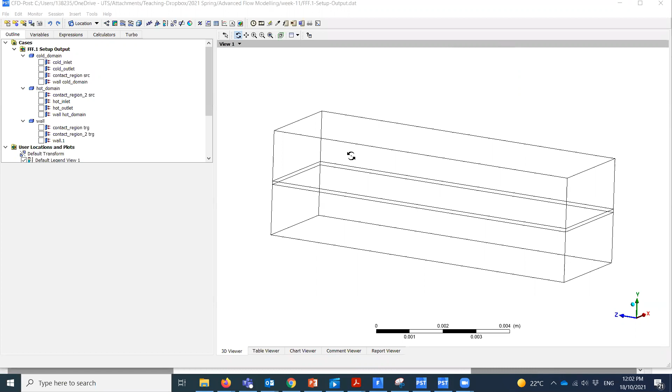Okay, so in this video, we will try to understand how to do all the post-processing for heat exchangers. So here, this is the model. You already know we use this simple model for heat transfer modeling. We have all the domains: the cold, the hot, and walls. So if I click on the wall, we have the tiny wall in between the hot and the

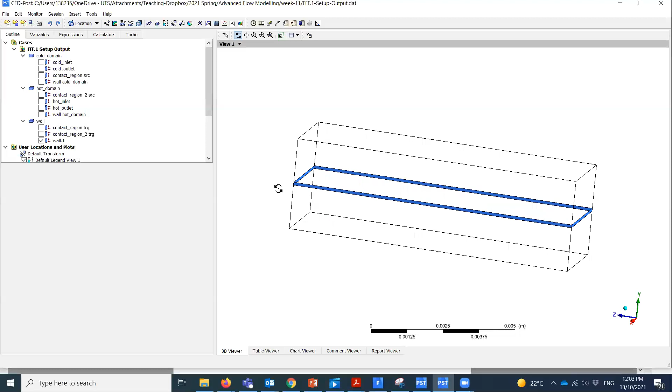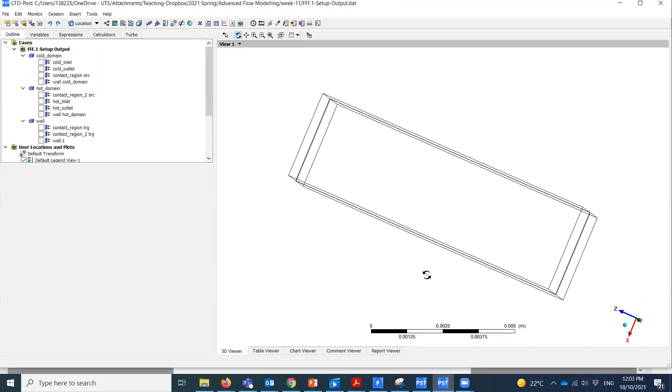cold domain. So initially, we all know how to do all the post-processing basically for the velocity, temperature, or pressure. So now I'll quickly show you how you can do the post-processing for this case. So let's say I'll just use the model like this. I will only check this wireframe. If you want, you can actually click it here and then you'll see nothing.

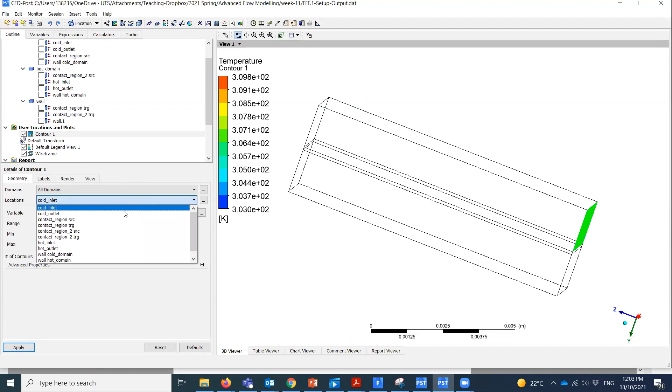Anyways, so let's click on the contours. Then you can select the variable temperature, and definitely we'll select the local temperature, not the global one. And if you click on apply, you see I selected only the cold inlet. So what you can do, you can click here, you can see these three dots, and select all the domains. So click on OK and then click on apply.

So previously it was a little different. We created a plane for velocity or pressure for the previous two projects. And now when we're talking about heat transfer, we need to think about the whole domain, like how it is happening in between the cold and the hot domain. Now, if you want to remove the wireframe, you can do it. So now you'll see how it looks. You see, it's clearly showing the contours.

If you want to include more contours, you just increase the number of contours. Then it will show all the transitions, like how the hot and the cold fluid is going. And definitely you should think about the quality of the figure. Anyways, so this is how you can show the temperature contour, okay? So you can do that.

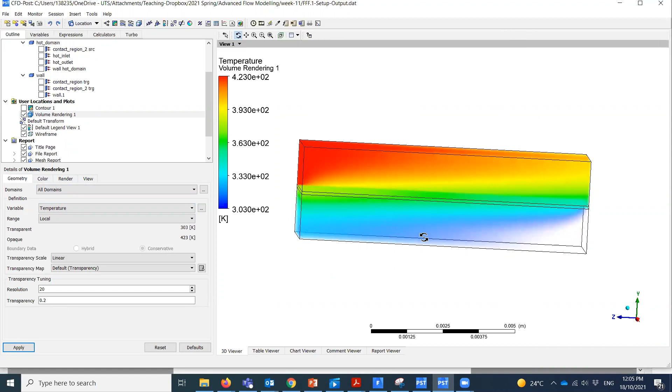If you want to show some volume rendering contours, you can just uncheck this. For the volume rendering, select the variable temperature and then the local temperature and see how it looks. You see, it looks nice, but in this case, I would suggest you select the wireframe for a better view. So look here at how it looks if you use the volume rendering.

Anyways, we will use this contour for now. We need to answer the question of how the temperature is changing from one end to another end, I mean the temperature profile. So what I can do, I can create a line from here to here, or I can use a line along the diagonal of the system.

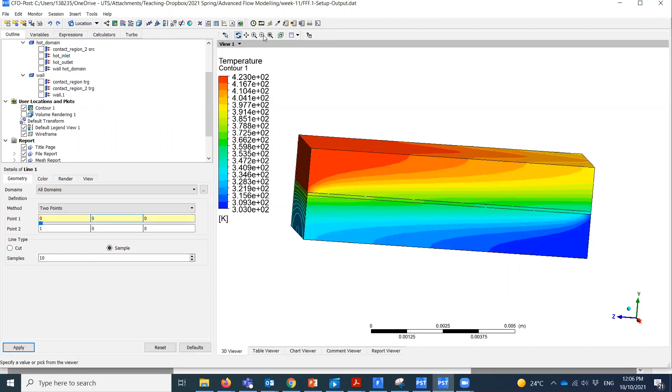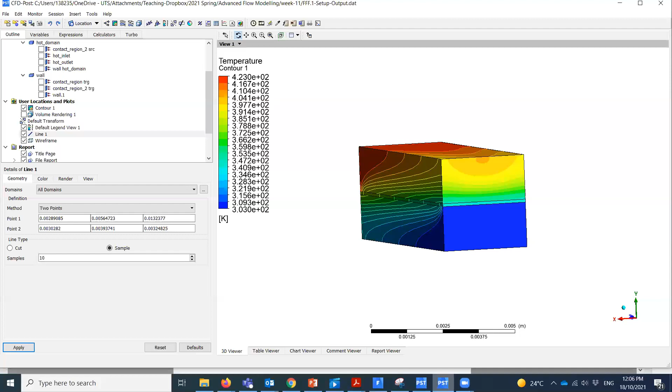So let's go to the location, click on line, and then I'll just put my mouse cursor over here. I'll rotate it a little bit. So let's say I'll select this point, the middle point. It will automatically extract those points. Now I'm using the hot inlet and the cold inlet. So put your mouse cursor here again and click there. If you click on apply, you see this is the line we created, from the hot inlet to the cold inlet.

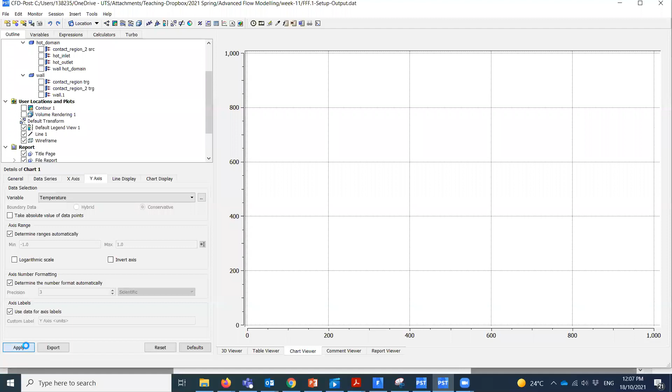And now if you go to the charts, you can select the location here, line 1, for the x-axis. You select what you want to show. So let's take position, y-axis the temperature, and click on apply. So now you see how the temperature profile looks.

And it makes sense because, you see, we found in this line it is the hot inlet, the temperature is 420, the cold inlet you see 300. So we can validate this. If you go to 3D view and look at this, you see the temperature is higher at this position and the low temperature here. So it's kind of 423 and this is 303, something like this. So look here. Yeah, this is 300, so it should be kind of 303, and this is 423. So it makes sense.

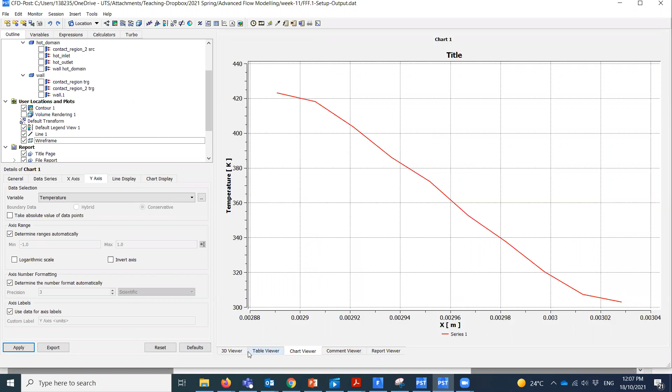So if you have multiple cases, I would suggest you put all plots in the same frame and do some comparisons. So this is how you will show the temperature profile. But for the temperature contours, I would suggest you present it like this. Don't create the planes, because I really want to see how the heat transfer is happening between the hot domain and the cold domain.

So if you make a plane and draw the temperature contour on that plane, it's not correct. Anyways, I'll just create a plane now, and I'll show you what it could be. So I'll use the XY plane like this. So let's say some random values. If we move this one, I'll just move this line.

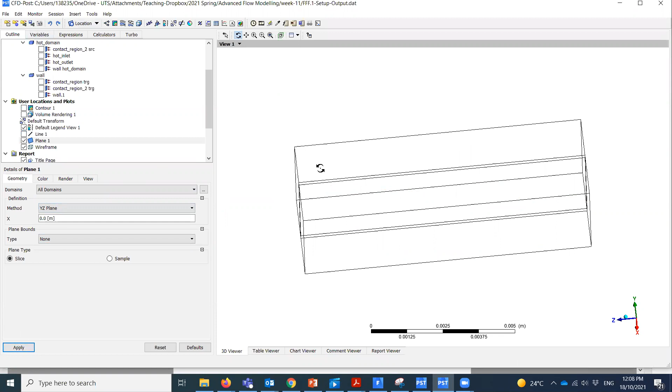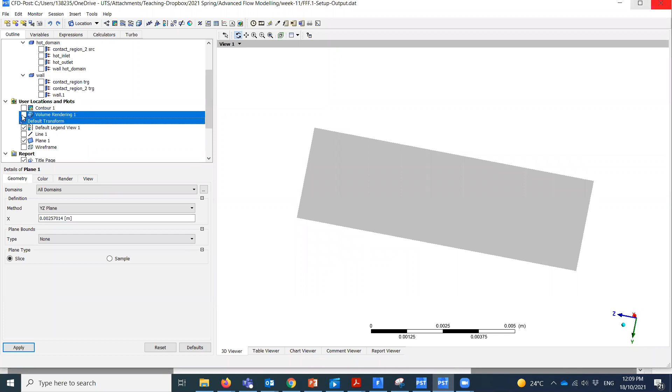Okay, instead of XY, let's say the YZ plane. So we should change this value. Yeah, so I will create a line like this. So move this wireframe. So this is our plane. Now, what you can do, you can go to the contours. Click on the contours. Instead of this, just select the plane and see the temperature.

Look how it looks when we created the plane and then plotted the temperature contour. It's clearly showing. The way I created the plane, it was in the YZ axis. So this is the hot and this is the cold plate. The hot plate is going this way, cold plate is going this way. And it's clearly showing the heat transfer. But I really want to see it for the whole domain.

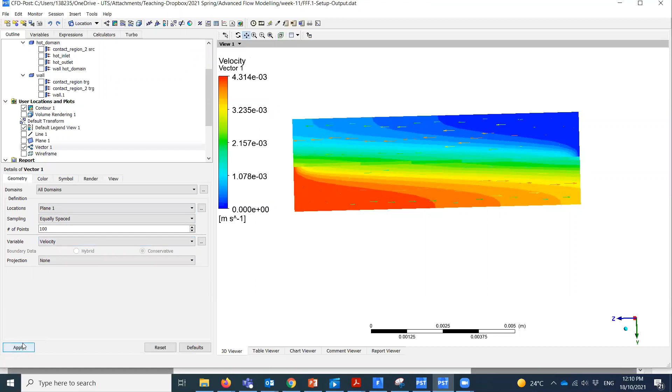So now we need to answer another question: how to plot the vectors. We can plot the vectors in the direction of the flow and the heat transfer. So click on the vectors, select the location plane and the sampling. I will suggest you use the equally spaced, and for the variable, you just use the velocity for now. Move that, put this vector like this, it just creates a number of points, and just click on apply.

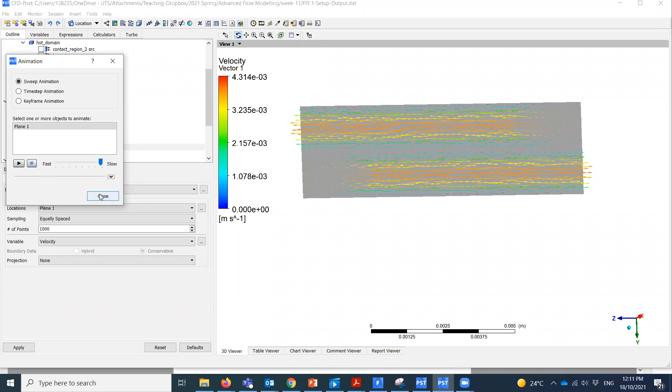So this is how you can see how the contours look. So it is actually our contour, and if you want to see how it is actually moving, you can make some animations. You can see this is so fast, but we can see the other contours over there. We need to use more time steps. Anyway, that's not our target. So you can make it much better.

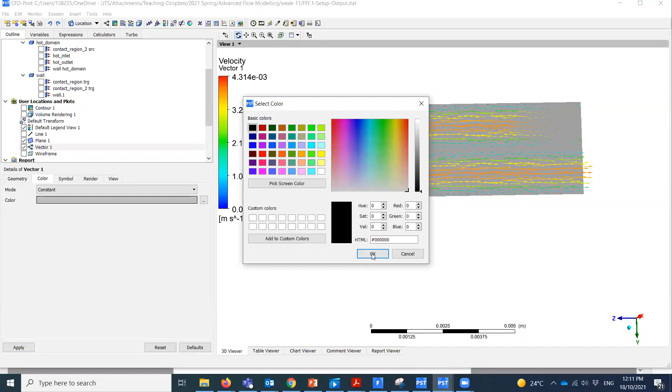This is actually showing the colors. So you can change the colors from here, and you can use the constant. Let's say if you use the black color, then it will be more visible like this. You can change the symbol and the symbol size as well. So let's say if you put it 0.7, we have some errors just outside. So if you want, you can fix it. If it is 0.4, then it looks like this.

You can make more zoom. So you can do a lot of things. You can change the arrows. Yeah, so you can play with it later on. So this is how you can generate the vector plots for this case.

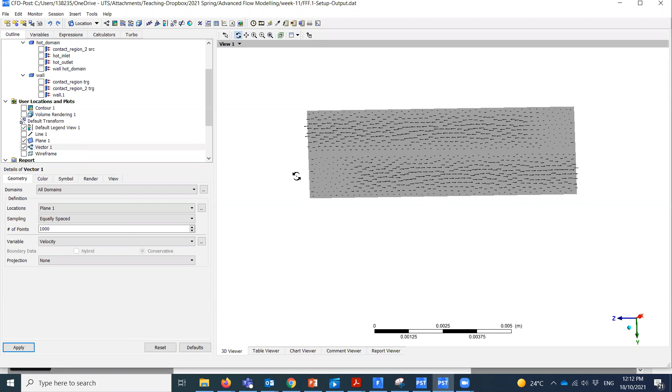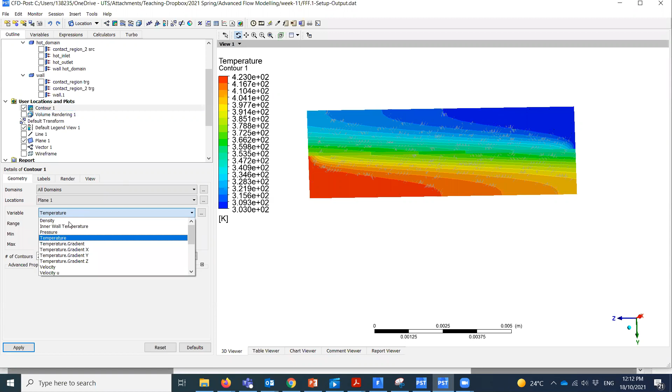So for pressure contour, I would suggest you can create different planes along different axes, and that will give you a much better figure for the pressure contour. Okay, so you can also calculate the pressure drop for better post-processing. This is better post-processing and better presentation. You can calculate the pressure variation, the pressure drop between the inlets and the outlets of the hot and cold domain, and that will be really fantastic.

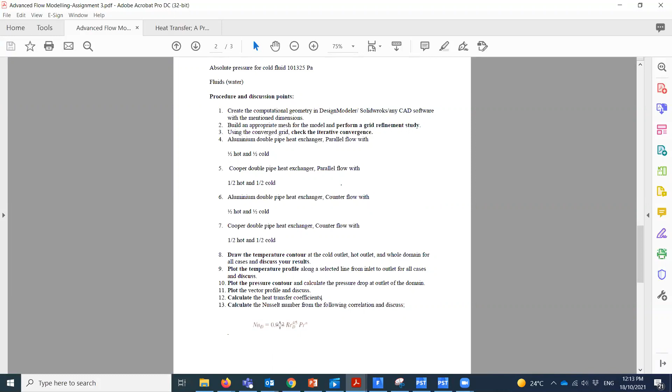So now the remaining question, let me check what sort of other question you need to answer. So we know temperature contour, temperature profile, pressure contour, vector profile. The heat transfer coefficient. Heat transfer coefficient, you need to use the formula. Okay, so at first you need to calculate this Nusselt number here. You look here, this is the Nusselt number correlation that you need to use. This is called the Dittus-Boelter correlation.

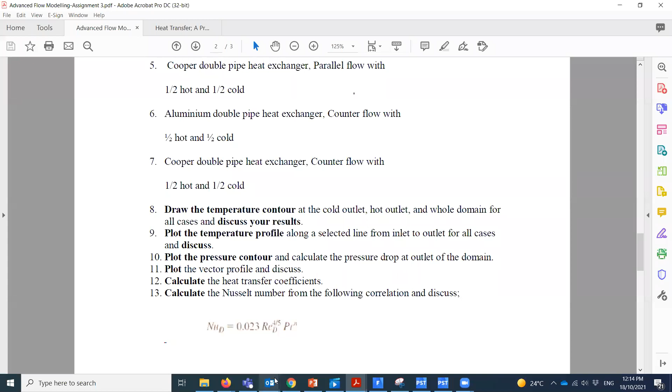This Reynolds number you'll definitely calculate by using your inlet velocity, your pipe diameter, okay, and the water viscosity that you need to use. You know, the Reynolds number is equal to rho VD over mu, viscosity. The Prandtl number, you know, for water, this is a constant value, and this is n. If it is a heating problem, it is 0.4. If it is a cooling problem, it is 0.3. So you need to use actually this formula, and then you can calculate the Nusselt number. Although I believe all of you know how to use this correlation.

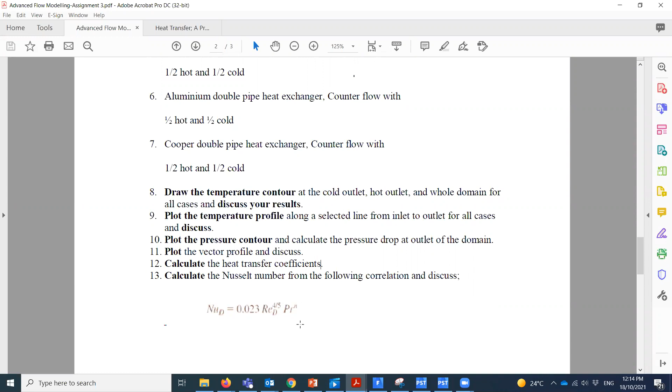So once you have these correlations, then you can actually use some formula from the heat transfer book. Like we know the formula to calculate the heat transfer coefficient. So I'll quickly show you one here. So yeah, so this is the formula, how you can calculate the heat transfer coefficient. This is a function of the Nusselt number. So you need the thermal conductivity, you need the hydraulic diameter, and you need the Nusselt number.

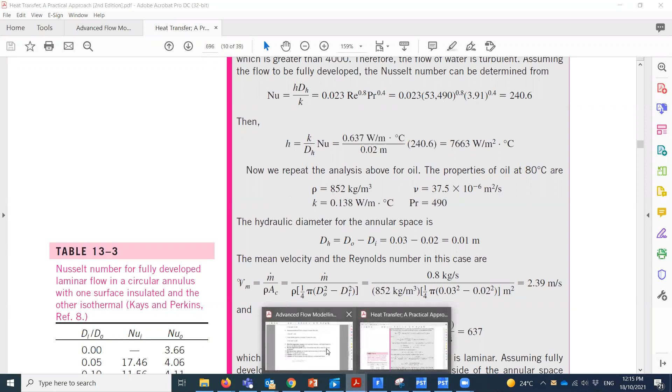So we already have the Nusselt number from that correlation. The thermal conductivity, you can get it from the tables, and hydraulic diameter, you can calculate it easily. So then you will be able to get the heat transfer coefficient. So this is the formula that you need to use for heat transfer coefficient. And finally, you need to answer the question. You need to connect your results with the existing literature.

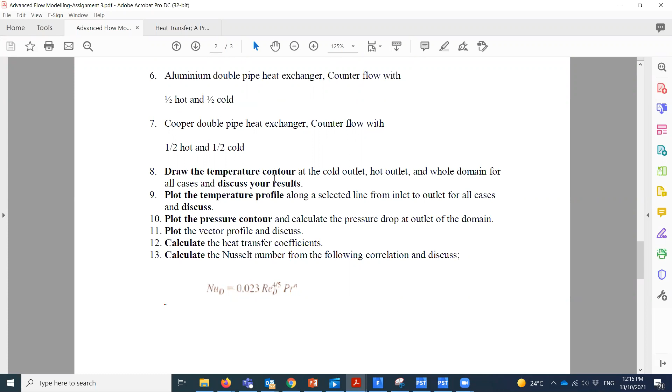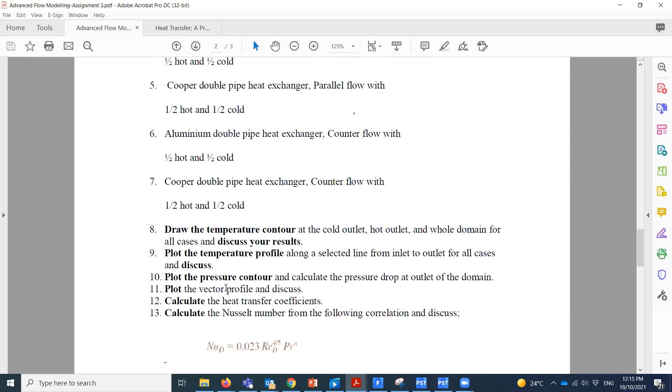So you just search. You can use some double pipe heat exchanger results, and there are a lot of options. You can select the counter flow, you can select the parallel flow, whatever you want. You have two cases. In fact, you need to run 4 different simulations. So total 4 different simulations for 2 different flows, counter and parallel flow. So this is the whole question you need to answer for this report.

So I believe you understand, and I will discuss more advanced and innovative techniques during the class, like how you can analyze the temperature and the pressure or the vectors in different planes. And I will show you some techniques, like how you can easily calculate the heat transfer coefficient and the Nusselt number. So that's it for now.